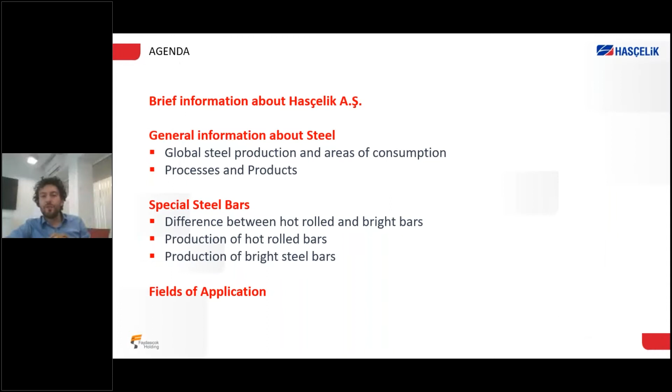Hasçelik is one of the largest hot rolled and bright steel special steel bar manufacturers in Turkey, with 420,000 tons per year production capacity.

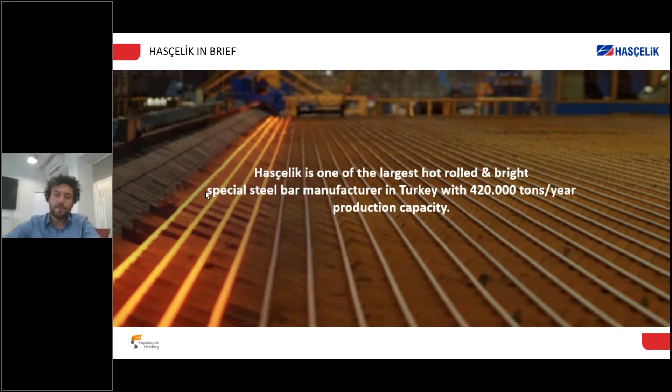We were established in 1968 in Konya as a distribution center. After that, we opened our bright steel facility in Konya. Then we came to Istanbul, which has a much bigger market in Turkey, as a distribution center. After that, we opened our bright steel facility and our special steel hot rolling mill, which is the raw material of bright steel bars. Then we opened our bright steel facility in Istanbul, which is the most modern bright steel manufacturer in Turkey.

Four years ago, we became a holding company as Faydasıçok Holding. Faydasıçok is the surname of our founder. Last year, we opened our offices in Germany and in England, which we call Hasçelik GmbH and Hasçelik Steel UK. We also opened our stock warehouse in Antwerp.

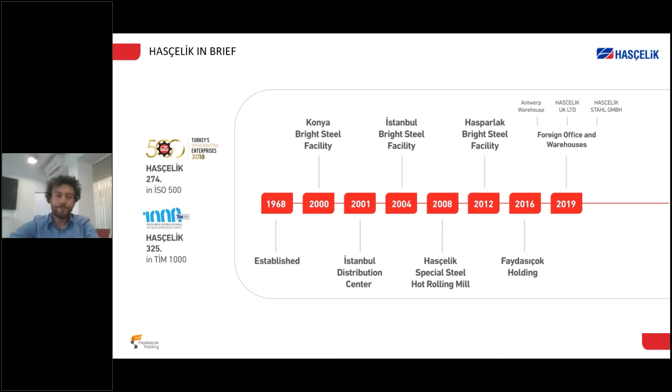We are very powerful in our export department. We export to 5 different continents and 67 different countries, from North America to New Zealand and Australia. Our office in Germany is located in Düsseldorf, headquarters is in Istanbul, warehouse in Antwerp, and we have one more warehouse in England belonging to our office called Hasçelik UK Limited.

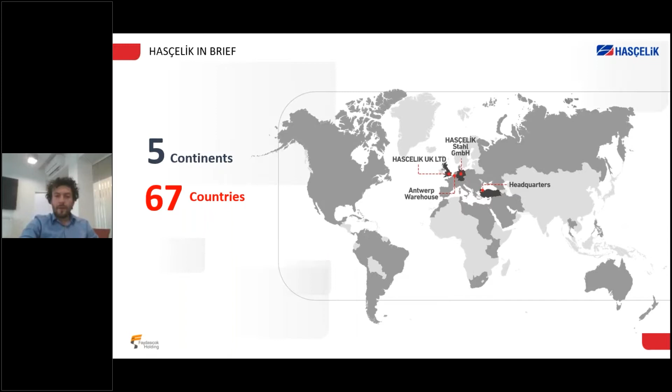So why is steel so important to our life? Wherever you look around, you see steel in bridges, cars, houses, everywhere. Even bottles of plastic are produced by machines which are made of steel. Steel is powerful in durability and quality, strong but flexible in design when you heat it, and cost efficient.

As you know, the raw material of steel is iron ore, and iron ore is extracted from the ground. So the raw material of steel is actually found in nature, which is why it's pretty cheap to extract, and it's recyclable, which is most important. Steel is one of the most recyclable materials in the world.

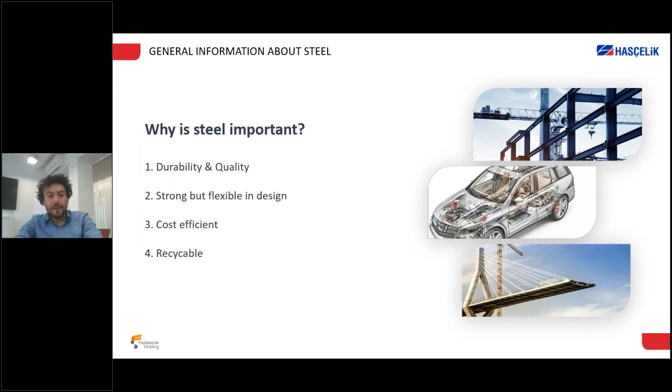I would like to tell you about production here. The sectors of steel use are 41% construction, 14% pipe, 11% automotive, 15% metal products, and 2% white goods.

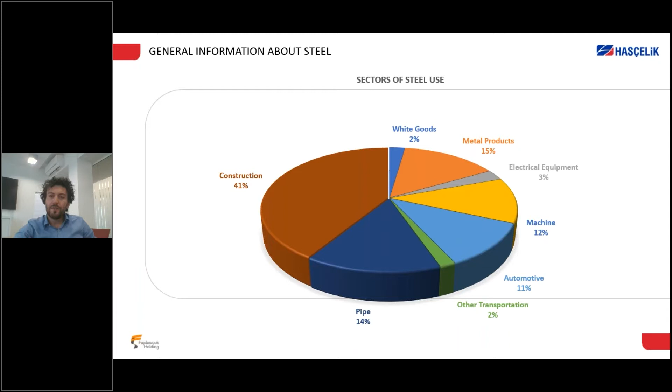As you see, the most production of steel is made by the Chinese, at 54%. But Turkey, as you see here, is in the top 10. So the most production for steel in Europe is actually happening in Turkey and Germany.

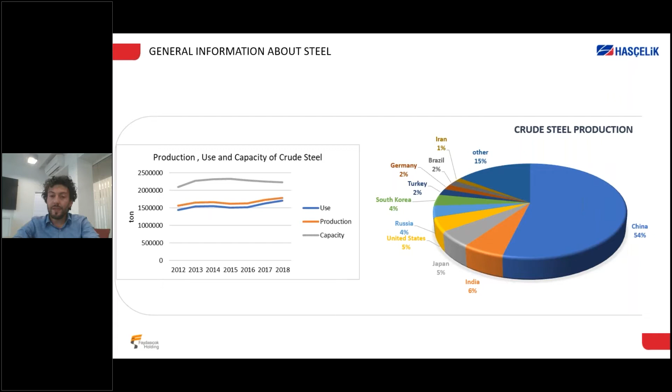How is steel produced? There are two types of production: electric arc furnace and blast furnace. What is the advantage of blast furnace? You can produce more steel in a cast. But in electric arc furnace, you can produce maybe 100, 150, or 200 tons in a cast.

In blast furnace you use iron ore as raw material, along with limestone and coke. But in electric arc furnace, you can use scrap. As you all know, steel production is increasing day by day, so after usage of steel we have to recycle it somehow. In this case, electric arc furnace is actually much more efficient than blast furnace.

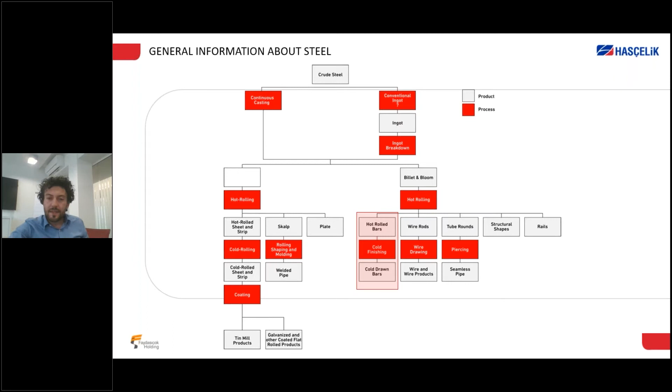Where we are in the production cycle is just right here in the middle. We produce from billets, hot rolled bars, and cold drawn bars.

And what is special steel? Special steel is used in industrial areas and produced with additional methods to the standard steel production methods, and contains different alloying elements. So compared with ordinary steel, special steel has higher mechanical strength.

When you have hot forming of the ordinary steel, which we use billets for, you are making smaller grain sizes, which is getting more suitable for forging or for bending, and better physical and chemical properties. Better physical means we are supplying, for example, 100 by 100 millimeter billets, but the end customer needs smaller sizes of rounds. So we are hot forming the billets of ordinary steel to make better physical position and more toughness, better dimensional tolerance, and higher performance.

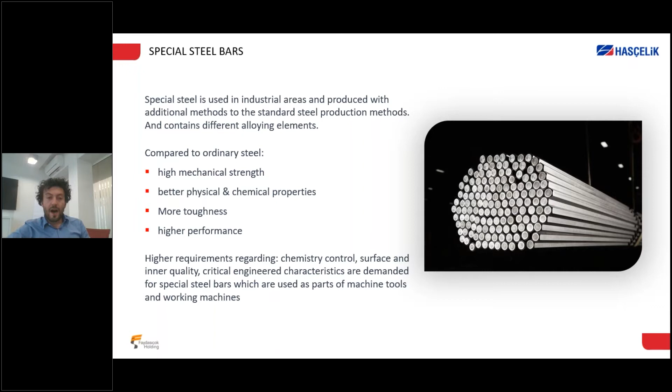And what is the difference between hot rolled bars and cold finish bars? Hot rolled bars are produced from billets, and it's more efficient in cost because there is no further production process after hot rolling, if required. But cold finish bars have much more efficient mechanical properties. It's like chewing gum — you are pulling from both sides, and in the middle you're making much better surface and much better mechanical properties. So it's getting harder, and you're increasing tensile and yield strength. The cold drawing process is the same as pulling up the chewing gum.

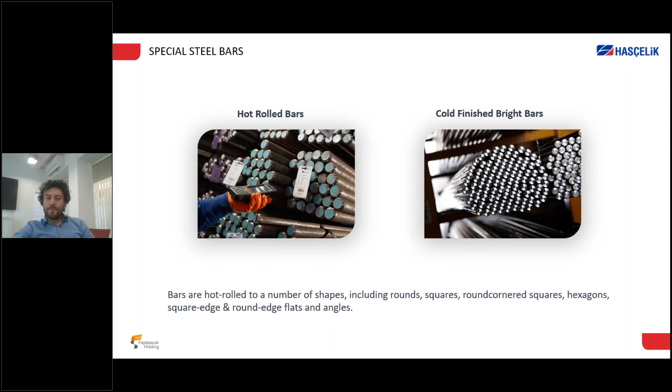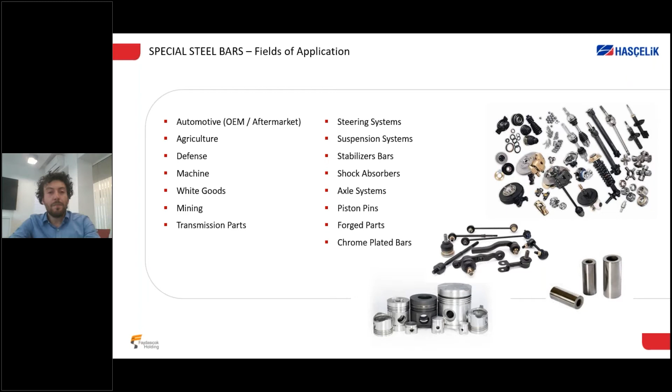Fields of applications: our solution partners are working in automotive, agricultural sector, defense sector, machine sector, white goods, mining, transmission parts, steering systems, suspension systems, and stabilizer bars. We are trying to give all our customers much better specification. If there is a need, we are improving the specification for the end users of these kinds of companies which we work for.

And you can see the grades here — what we name the steels. Construction steel, we name it, for example, S235, so 235 shows the minimum yield strength is 235 Newton per millimeter square. For carbon steels, it shows the carbon content, how much carbon is contained. And case hardening steels, heat treatable steels, spring steels, microalloy steels, and free cutting steels — all these grades we can produce in our hot rolling mill and our cold rolling mill.

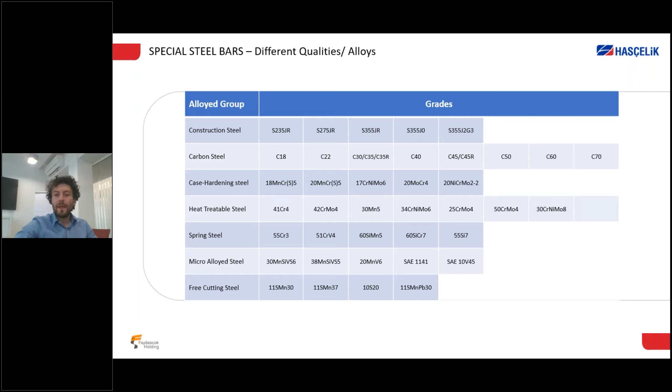Hot roll special steel bar manufacturing. We are located in Istanbul, with a 40,000 square meter production site, and closed area of 25,000 square meters, and production capacity of 250,000 tons. Our sizes range between 20 millimeters up to 120 millimeters, and this cycle changes every month — so if there's a production of 20 millimeter today, 20 millimeter will be produced next month.

We currently have IATF 16949, which is a technical specification aimed at the development of a quality management system that provides for continued improvement, emphasizing defect prevention and the reduction of variation and waste in the automotive industry supply chain and production. It is based on ISO 9001, which is required by the automotive industry.

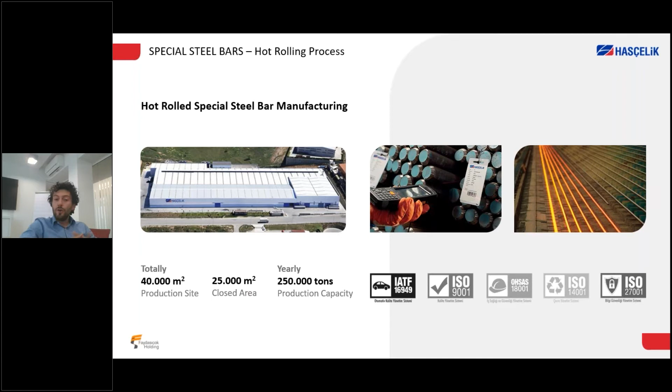So how do we produce hot rolling bars? On the left side you see billets, which is our raw material. These billets are heated in a reheating furnace after incoming control of steel billets, as you see in the middle of the picture. The billets we use are 150 by 150 millimeter, 160 by 160 millimeter, 200 by 200 millimeter sizes, and we can produce from these billets down to 20 millimeter. We heat our reheating furnace up to 1200 Celsius degrees.

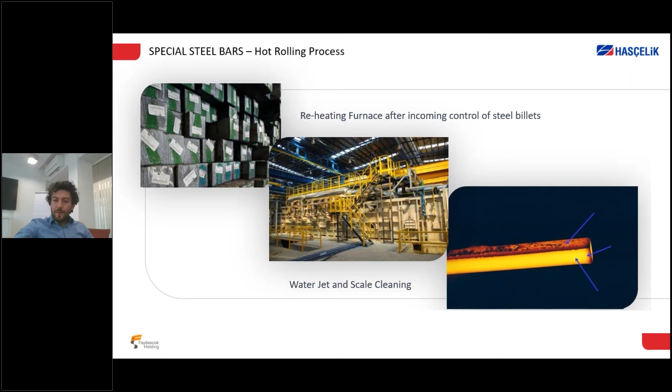After heating, the billets come through a water jet line in order to remove all the scales on the surface. These scales, as I was talking about recyclability, are used in the white goods area — so all this dirt of the steel is used in different industries. And as you see, some pictures of our hot rolling mill here.

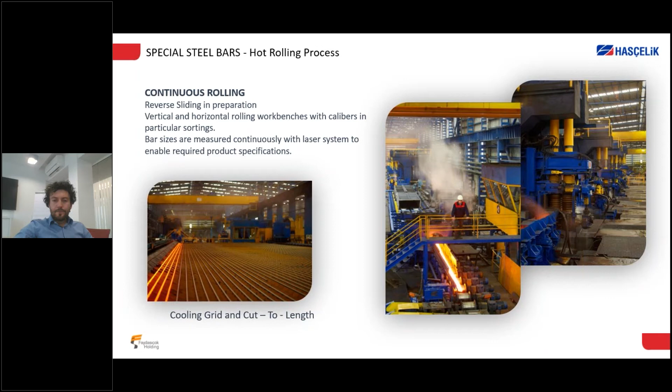After production of hot rolling bars, we transfer the bars to the crack control lines. We are evaluating cracks not by sampling, but 100% of the bars. So we check all single bars in our crack control lines. This is very important to end users.

We have two control lines: one for surface defect control, one for internal defect control. Surface defect control is based on magnetic flux leakage, and internal defect control is based on rotating water. We are capable to guarantee from class A for surface defect control up to class D, and for internal defects we can guarantee from ultrasonic class 1 up to 4.

But for some special requirements, we are capable to get out of the standards of EN 10308 and give much better internal defect control.

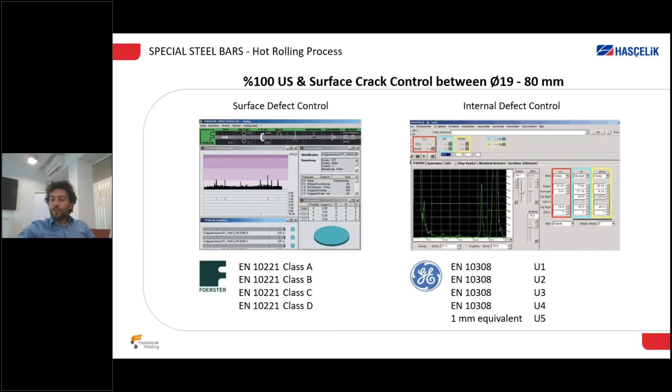And heat treatments: in our heat treatment furnace we do annealing and stress relieving. Our capacity is 60 tons per charge, and dimensions for what we produce in our rolling mill range from 19 millimeters up to 120 millimeters.

Why do we do this? If there's a requirement from machining companies, and if they machine hard materials, if the material has chromium, it is hard enough that it's difficult to peel. So in this case, we are reducing hardness, meaning increasing ductility, so the machines can much more easily peel these materials, for example.

We also do stress relieving. When you cut the materials, you bring all the stress to one point, so you have to relieve that stress. We are capable of stress relieving the materials that we produce in our hot rolling mill.

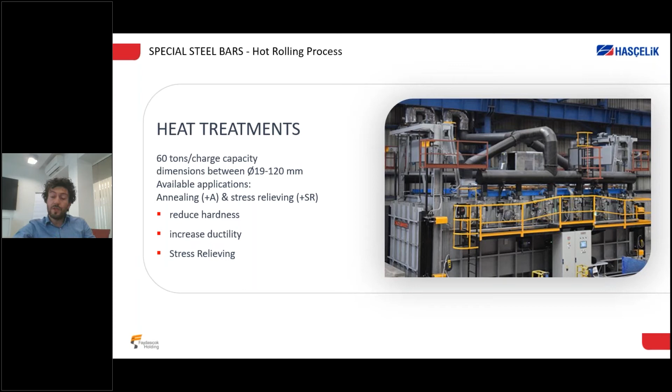Special steel bar manufacturing: this company is just 1 kilometer away from the hot rolling mill. Bright steel products need raw material from hot roll bars, which we actually produce. Our hot rolling mill and bright steel mill work systematically together through SAP, so if there is an order, the hot rolling mill directly sees what is demanded for bright bars, giving customers a much shorter production time.

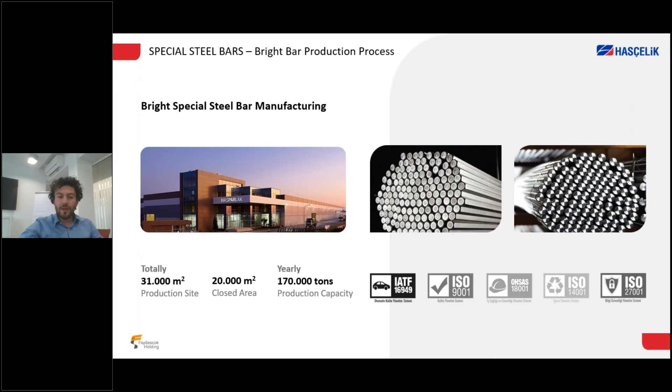Our production site is 31,000 square meters, and the closed area is 20,000 square meters. Capacity for bright steel bars is 170,000 tons per year.

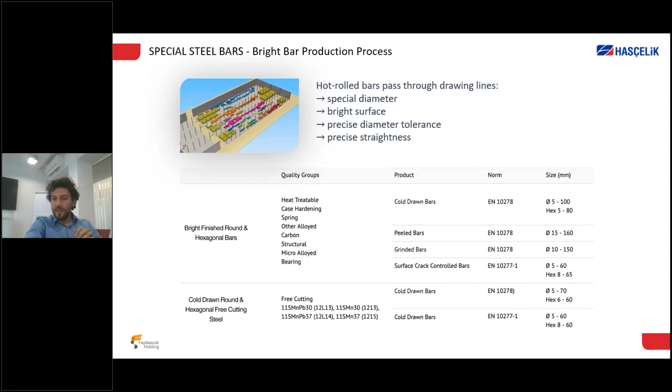As you see here, all what we produce: from 5 millimeters up to 150 millimeters. There are different types of production of bright steel bars: one is cold rolling, one is peeling, and one is grinding.

We have two lines from coil to bar. We supply coil from different sources, with a capacity of 65,000 tons per year for small sizes. We produce in these two lines from 5 millimeters up to 28 millimeters, and we can guarantee up to H9 tolerance.

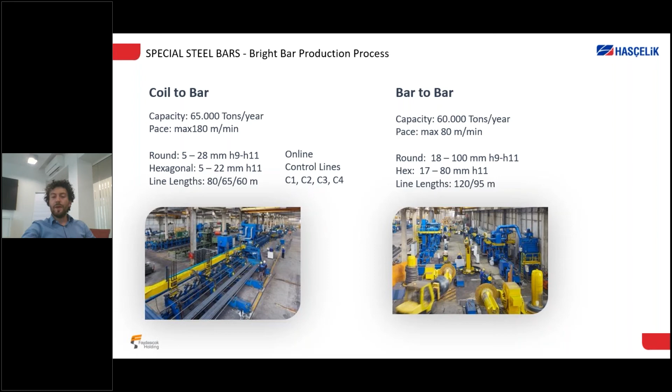Our bar to bar lines, we have two lines as well, originating from Europe, with a capacity of 60,000 tons per year. We can produce here from 18 up to 100 millimeters, with tolerance up to H9.

And our peeling process: the peeling process is a little different than cold rolling. This is a kind of machining of raw materials. In cold rolling you're improving mechanical properties, but in the peeling process, the raw material of round bars that's hot rolled stays the same. We are only making it much more bright than hot rolled bars on the surface.

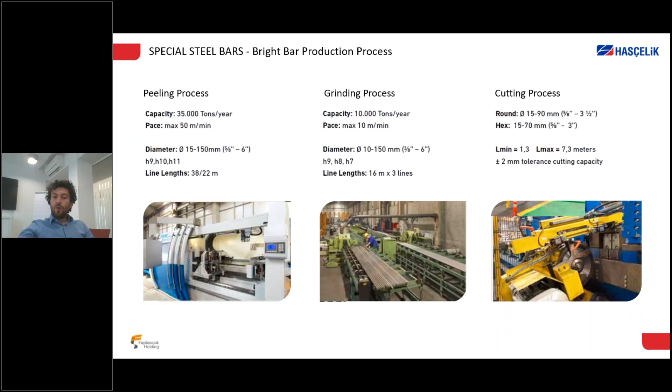We can produce in our two lines here from 15 up to 150 millimeters, up to H9 dimension tolerance. We also have a grinding process, with 10,000 tons per year capacity, and here we are able to produce up to H7. So if customers need much more precise dimension tolerance, we take the cold rolled or peeled materials to our grinding process.

And surface crack control: our capacity is 10,000 tons per year, and we are capable of checking the surface of the metals between 5 to 60 millimeters, up to class 4, on our Foerster machine from Germany.

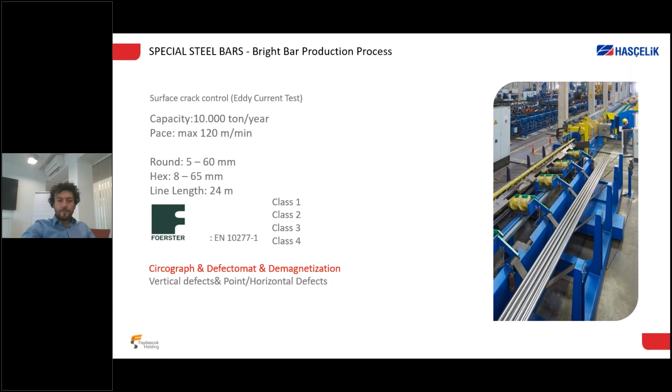I would like to tell you about oiling as well. Bright steel bars are actually capable of developing rust on the surface because you are cold deforming the materials. That's why we have to use something just to avoid rust and corrosion.

After production of cold rolled bars, we oil the surfaces with anti-corrosion oils. For example, we ship materials to South America and Australia, so materials stay in containers for over 1 month.

And we have to avoid having rust on the surface of the materials. So after years, we innovated our oiling system as well, and now it's working pretty well. I would like to tell you in this page about our innovations.

We call it high performance special steel. We introduce here a non-standard measurement mechanism, so we aim to be out of the standard and reach better straightness tolerance. For example, EN 10278, the finished bar standard, requires 1 millimeter straightness per meter. With our high performance steel innovation, we are capable of reaching 0.5 millimeter per meter, aiming for 0.3 millimeter per meter for cold drawn bars. Companies working with high speed rotation processes need to avoid ovality for sure.

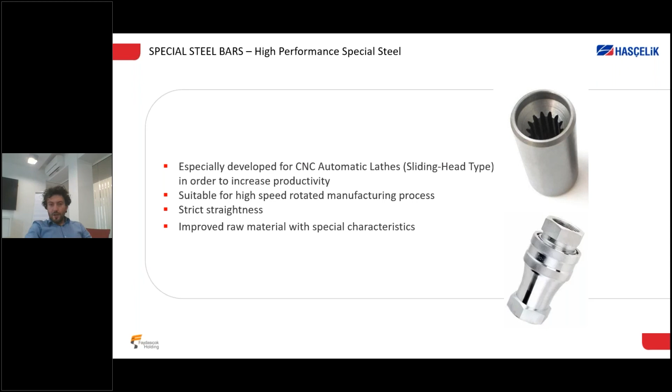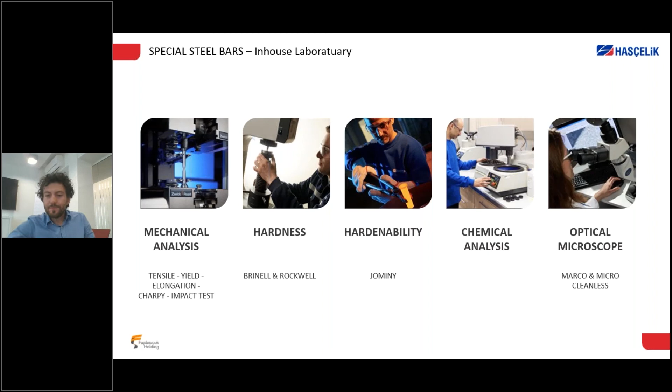Thank you. I'm actually near the end of my presentation, so I would like to just tell you about our educational foundation. All the innovation in high quantities of production, and the stability in the markets in 67 different countries, is related to developing the values of our engineers.

So here I would like to tell you that we are carrying forward ladies engineer students in college. As you know, all over the world engineers are mostly men, maybe 80% or even more. That's why we would like to increase the number of ladies in our industry. We are giving employment support, scholarships, internship support, academy presentations in high schools, and mentoring.

So thank you for listening. If you have any questions, please just write them on the right side.